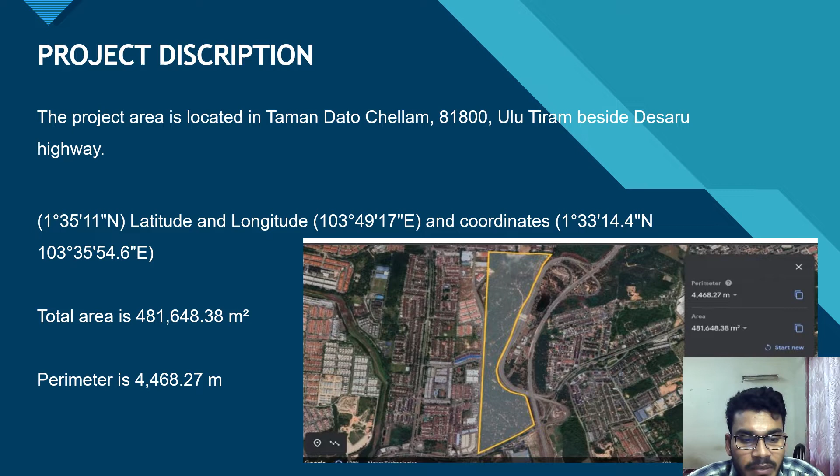In introduction, first of all, what is water reticulation? Water reticulation system is a network of pumps, pipes and water storage system designed for water storage and distribution. The water reticulation field includes water delivery system design, operation and servicing. This covers all of the town or city's public pipework including drainage system, access chamber, and also construction and maintenance.

The aim of this system is to provide a consumer with an accurate amount of treated water. It should be capable of sustaining the degree of purity and should be watertight. It's also designed on the basis that even at the breakdown period, the water should be available. Additionally, a distribution system cost should be as low as possible.

Water reticulation products are primarily designed for a variety of residential, commercial, industrial and firefighting purposes to fulfill water quality requirements. The efficiency of a reticulation mechanism can be measured for a given flow rate based on the pressure available in the system.

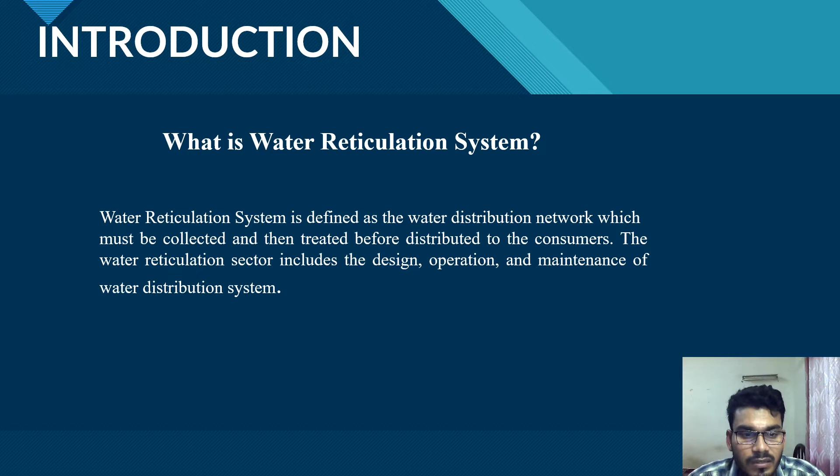Now our scope of work is: first, proposed suitable location for water tank. Second, decide type of water tank and design the size of water tank. Third, proposed suitable pipe networks. And the last one is decide types of pipe and its size.

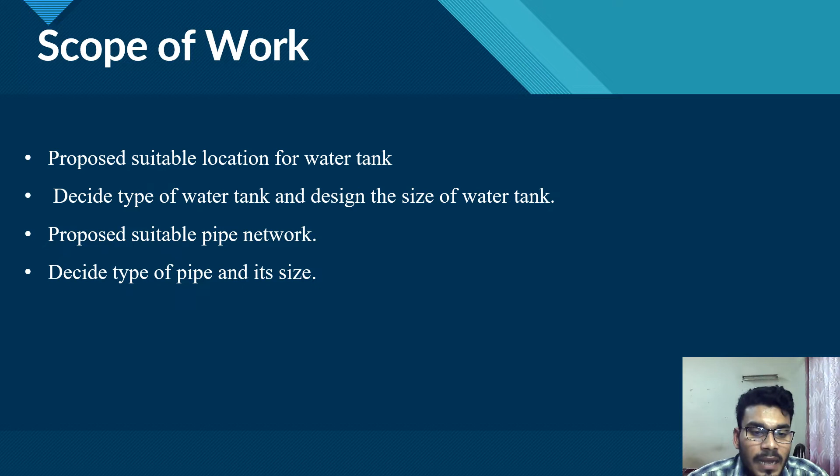The objectives of our design are to determine the capacity of water tank, to determine the flow rates in pipes, to ensure the minimum residual pressure heads are satisfied, to determine the appropriate pipe size and pipe types, and to determine the height of the elevated water tank.

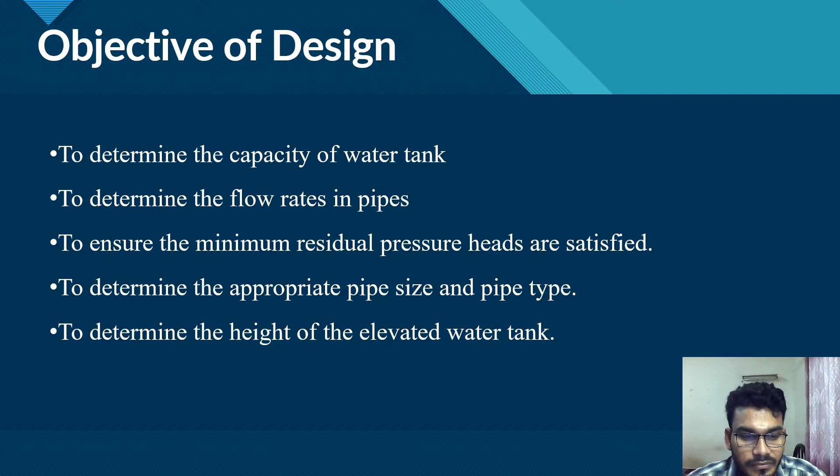Most important project notes are: this project will cover only water reticulation pipelines. The whole project needs to be divided into certain numbers of areas where road lengths and proposal levels vary. The purpose of the water reticulation system is to supply treated water at sufficient pressure, enough for the consumers.

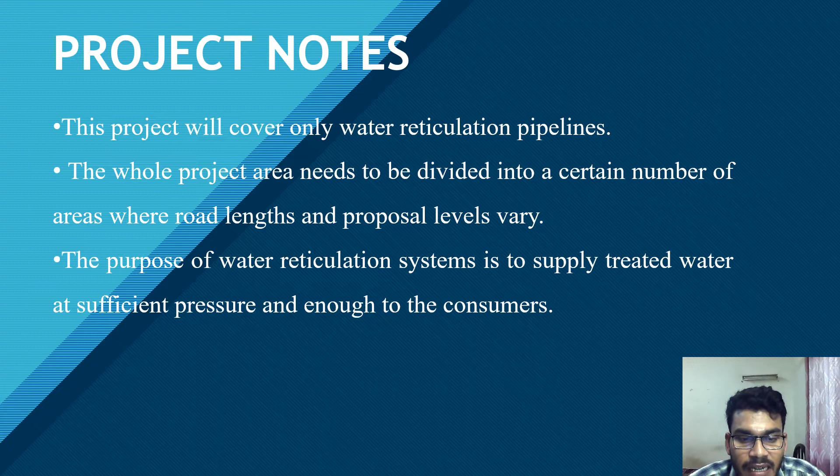Our next part is design criteria. The first one of design criteria is pipe network system. The type of pipe network that we have used is a closed loop pipe network. Closed loop pipe network is used to analyze the reticulation pipelines for the project.

By using the network, the water supply could reach every commercial load, even if a part of the pipelines is closed for maintenance. The Hardy Cross or head balance method is used in order to determine the residual pressure head by using the Bernoulli equation. The residual pressure head must be sufficient, or else the pipe diameter should be altered.

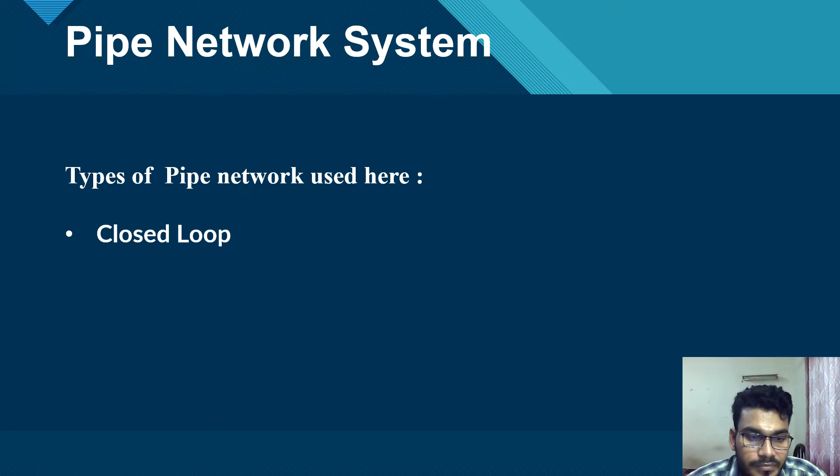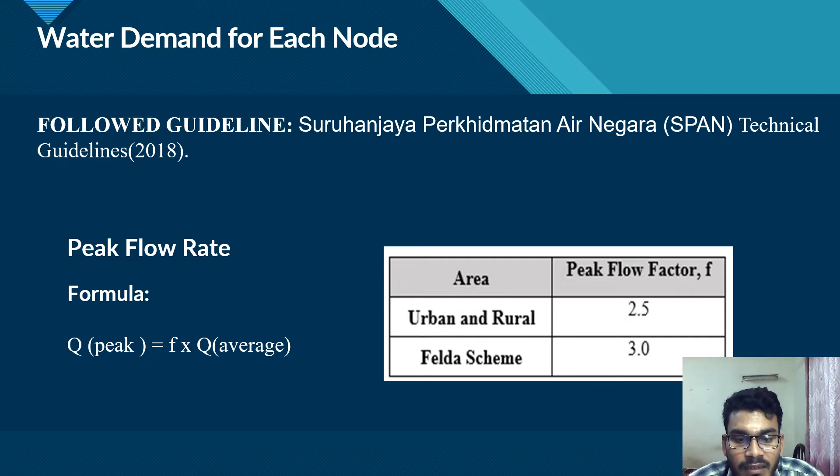Now in the water demand part, we followed the guideline of SPAN 2018. For calculating peak flow rate, the formula is Q peak equals F into Q average, where F is the peak flow factor, which is from SPAN. The urban and rural factor: rural factor is 2.5, and Felda scheme factor is 3.0. So we use here 2.5.

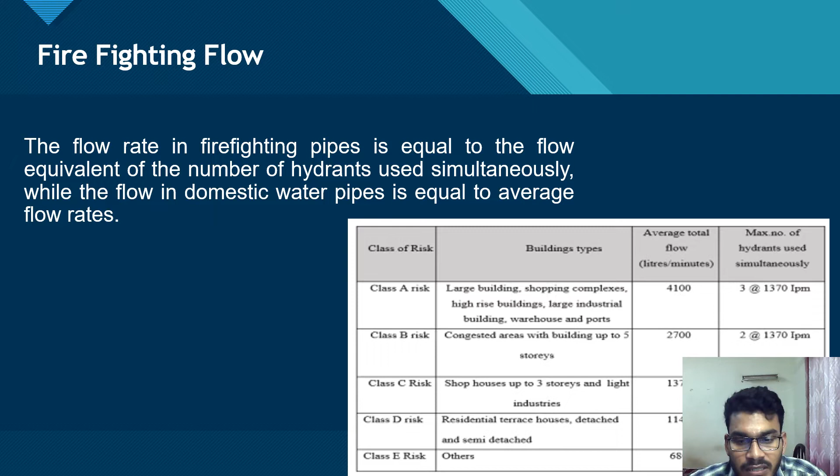In firefighting flow, the firefighting rate in the firefighting pipes is equal to the flow equivalent of the number of hydrants in use simultaneously, while the flow in domestic water pipelines is equal to average flow rates. This is the guideline for assuming firefighting flow factor, so in our work we use here 1.

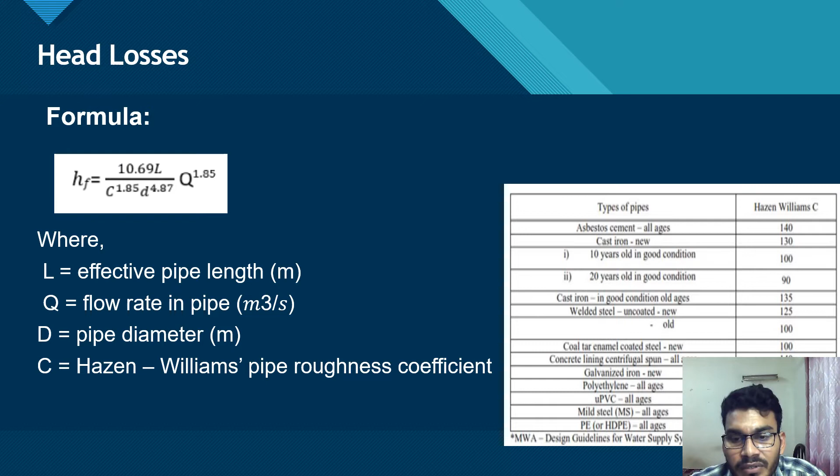Head losses: the formula of head losses is as given here. L is equal to effective pipeline length in meters, Q is equal to flow rate in pipes, D is equal to pipe diameter, and C is the Hazen-Williams roughness coefficient, which can be obtained from this table. In our work we use 130 as the Hazen-Williams coefficient.

The maximum allowable velocity, in conjunction with Malaysian Water Association, according to this, the pipeline allowable velocity is to be 2.6 meters per second.

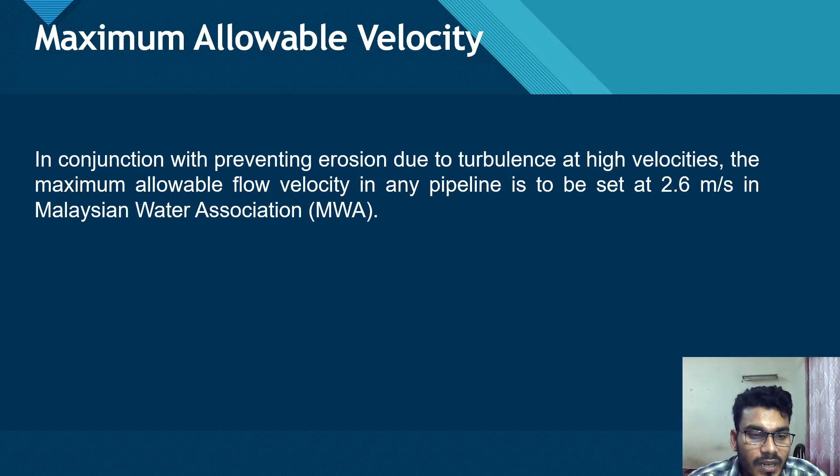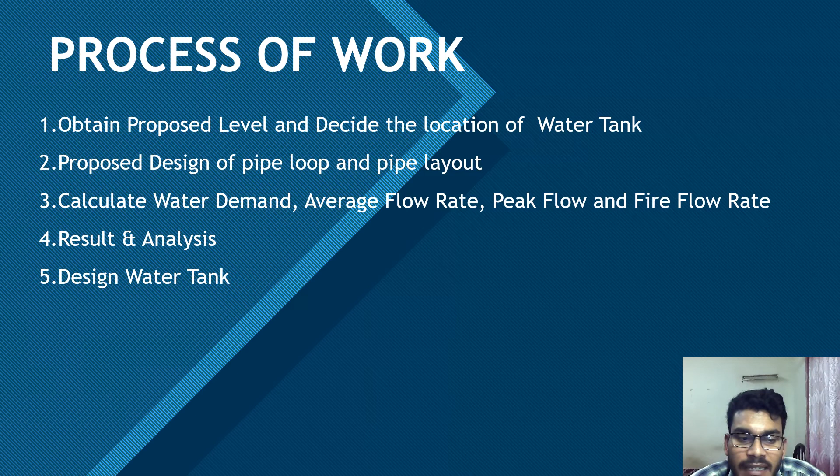In the process of our work, we have followed 5 stages: first, obtain proposed level and decide the location of water tank; second, propose design of pipe loop and pipe layout; third, calculate water demand, average flow rate, peak flow, and fire flow rate; fourth, result and analysis; and lastly, design water tank.

In the first step, we need to obtain the proposed level and decide the location of the water tank. We received the proposed level from the Department of Earthwork, which is 78 meters, so we decided our tank location is at 78 meters.

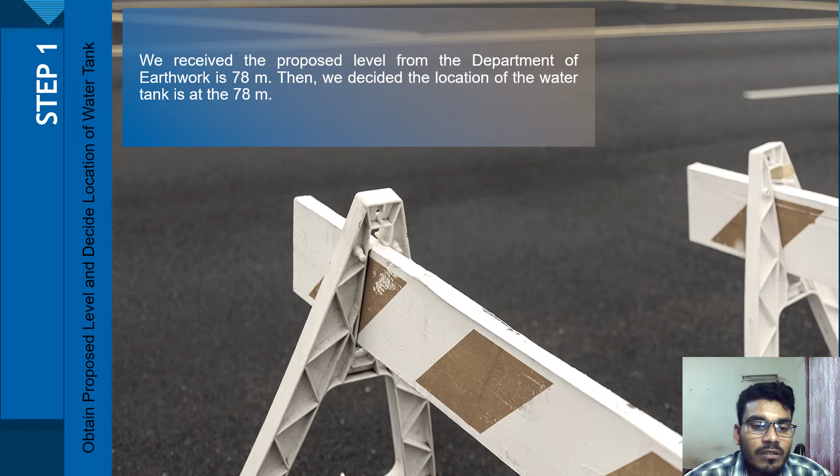In second step, we need to propose design of pipe loop and pipe layout. As you can see here, the first one is pipe loop which has 19 areas, and second one is proposed pipe network layout. So here we get number of pipes 72 and nodes 53, and all those are approved by our lecturer Dr. Mohd Ridza.

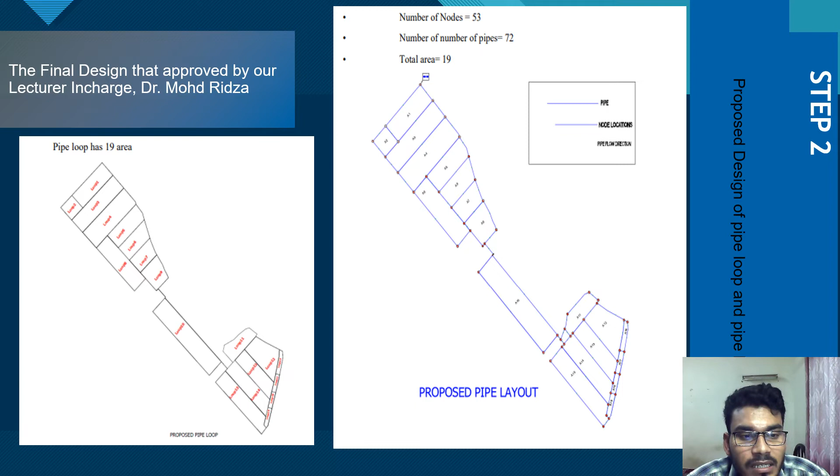In our third step, which is calculate water demand, peak flow rate, and also fire flow rate. The first one is the calculation of water demand at each node. So these are the nodes, this is area, and also industries type or something else. The second one is same, but here the water demand, then average flow, peak water demand, and peak fire flow.

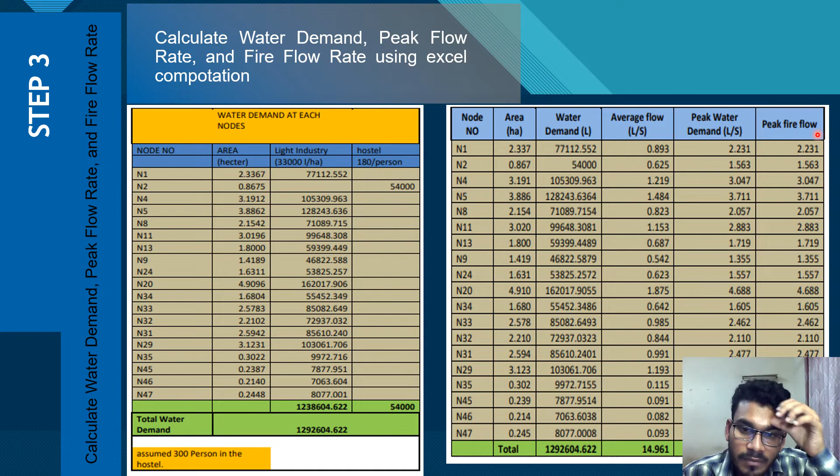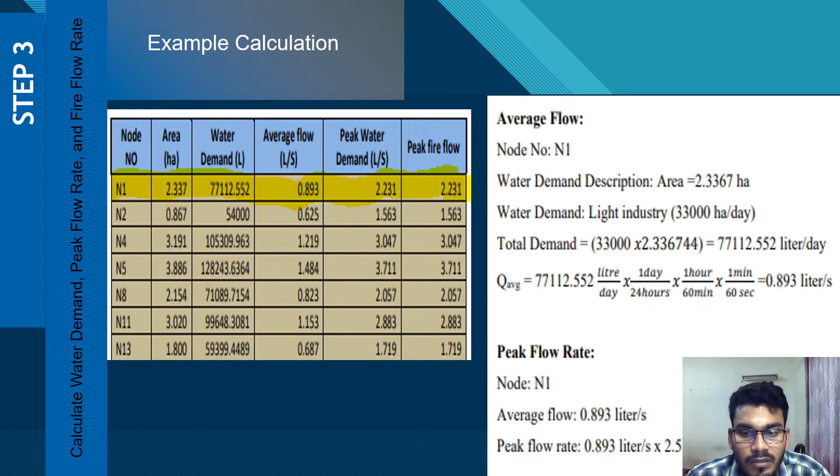For peak flow rate, water demand into 2.5 as the factor, so we'll get peak flow rate here, and the peak fire flow. For the peak fire flow, just peak water demand into 1, because we use here the coefficient which is 1. So we'll get this one in liters per second.

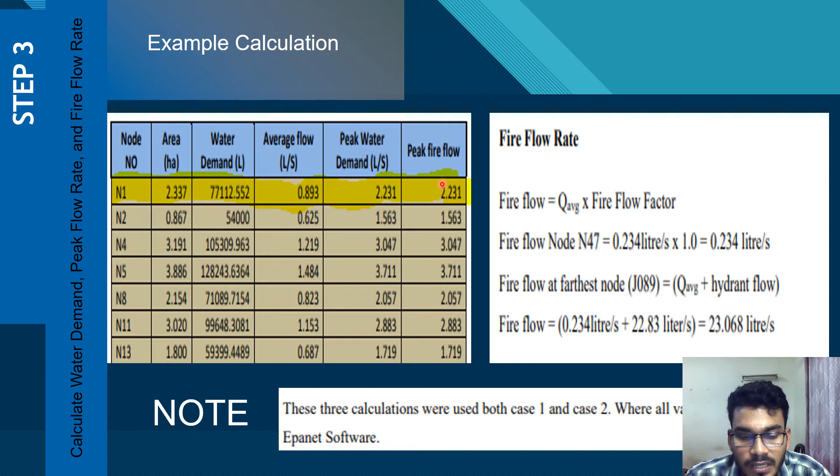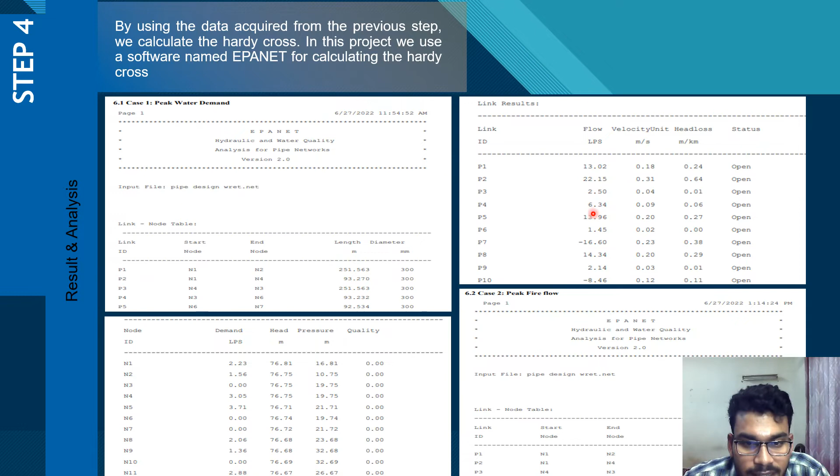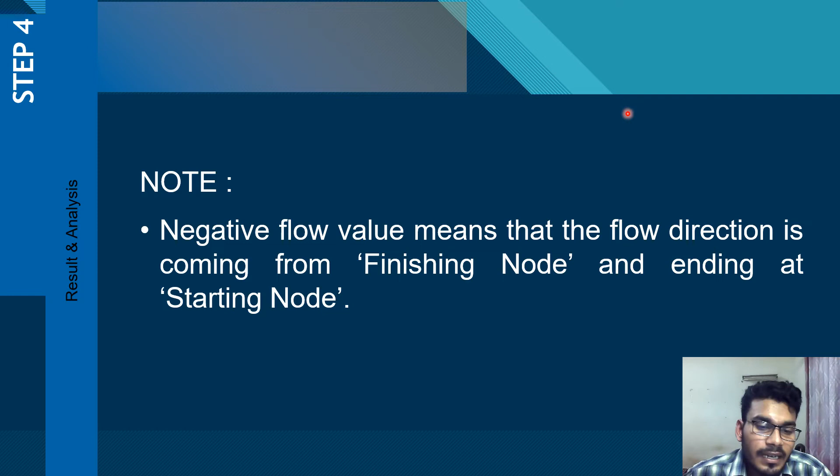Our fourth step is result and analysis. We are following here EPANET software for calculating Hardy-Cross method. Here we have followed two cases, those two are same. So peak water demand from the calculation we get as like this. An important note, negative flow values means the flow direction is coming from finishing nodes and ending at starting nodes. So this is our fire flow map.

The last step is design of water tank. Basically, we use Bernoulli equation for calculation in this part. To get the expected values, first of all we have the water demand, total water demand. So in case 1, volume of water tank is, we have it in liters, so we convert it to meter cube. In case 2, volume of water tank as like same. Since case 2 volume is larger than case 1 volume, proposed water tank will be designed according to case 2.

So proposed water tank, we assume diameter 32 meter and height 7 meter. Volume of water tank, from the formula pi d squared by 4 into h, we get 5,629.734 meter cube as the volume. Since the volume of water in case 2 is 5,204 meter cube, which is less than the volume of proposed water tank, the design is approved for meeting the criteria of water tank design.

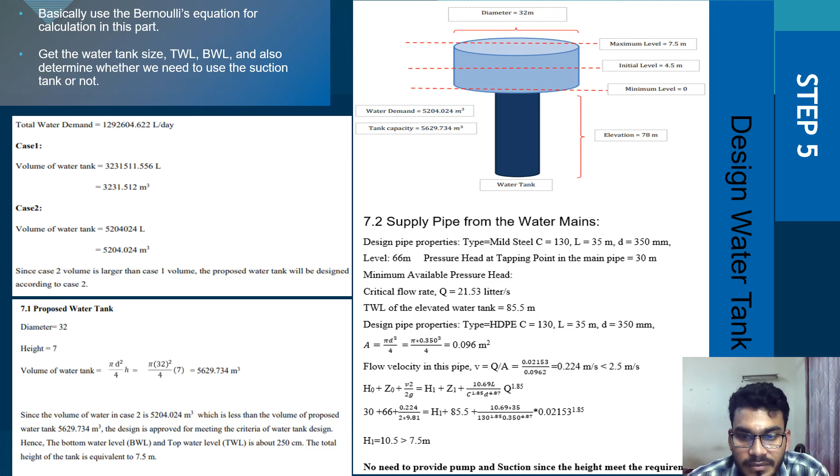The Hardy-Cross method was applied by using the EPANET software to calculate the flow rate and pressure of each node. To analyze for tank design, we recommended using 32 meter diameter with 7 meter of workable height and capacity of 5,629.734 meter cube, which will satisfy the total demand of industrial uses. There are two cases which have different capacity values, but here we design for case 2 because volume of water tank in case 2 is higher due to firefighting consideration to give sufficient pressure.

The local fire department in Malaysia requests that the hydrant minimum diameter be 150 millimeter. As a result, we decided to use mild steel pipes with diameter 300 millimeter as the fire flow pipe, and the pipe that connects the main pipe has a diameter of 350 millimeter, because they can withstand higher pressure demand. According to Malaysia Water Association (MWA) design guideline, all pipes must be buried at a depth of 1 meter.